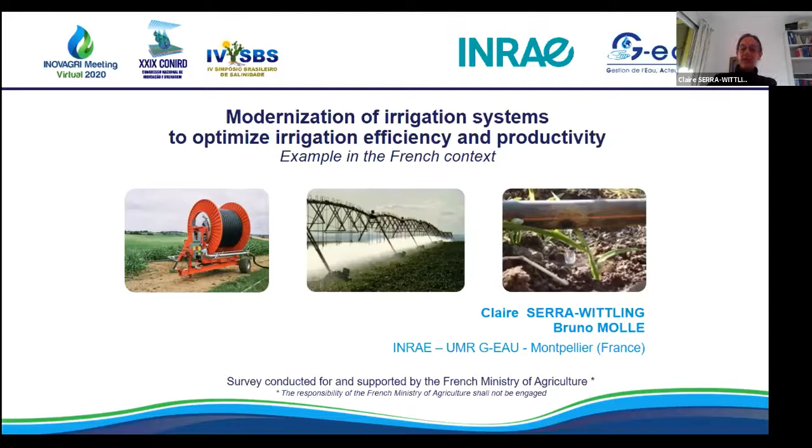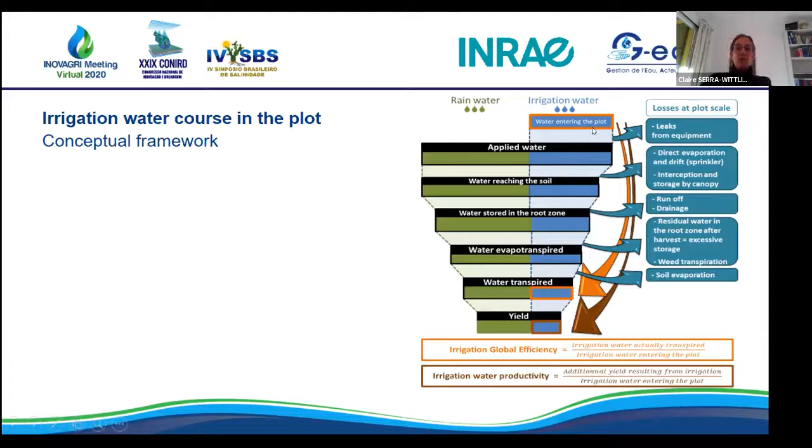So we can define the irrigation global efficiency, which is the ratio between the irrigation water actually transpired by the crop and the irrigation water entering the plot. We can also define the irrigation water productivity, which is the ratio between the additional yield resulting from irrigation and the irrigation water entering the plot.

We use a modeling approach to assess all these volumes of irrigation water. The crop model is called Optirrig. We can model the volumes at each step of irrigation water in the plot so that we can assess the lost volumes that are potential water savings. We can also assess the irrigation global efficiency and the irrigation water productivity as well.

The starting point of our study is the following: in the European Union, investments for irrigation modernization are supported by the European Agricultural Fund for Rural Development, and equipment at plot scale is eligible if it allows water savings of a minimum between 5 and 25%. So there was a need in France and in Europe to get references on water savings achieved in different conditions. That's what we have done.

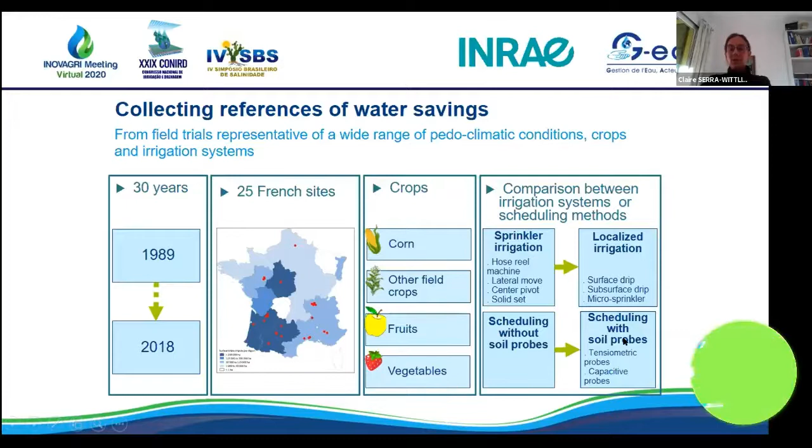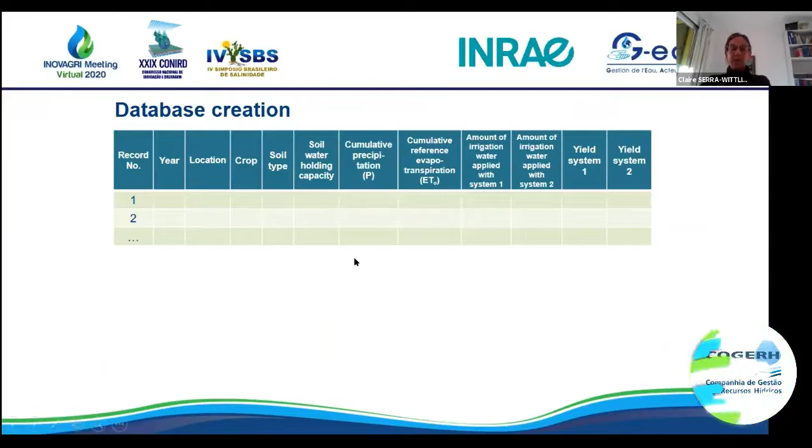This allowed us to create a database with different data: year, location, crop, soil type, etc. Here we have the amount of irrigation water applied with the most consuming system, the sprinkler system, and the least consuming system, the localized system. So we could assess the water saving made by switching from the first to the second system.

We could also assess a hydric deficit indicator of the crop season, that is the ratio between the reference evapotranspiration and the precipitation. And at last we wanted to check that there is no yield loss when switching from the sprinkler to the localized system.

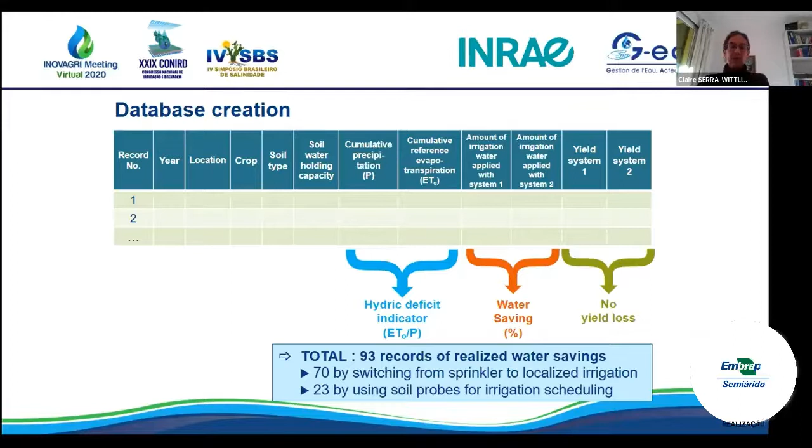Here you have some examples. You can see that when the first system is an overhead irrigation solid set system in an apple orchard, and the second system is an under-tree irrigation system with microjets, the observed water savings for apple were between 36 and 52%. For chestnuts, in another experiment, it was 31%.

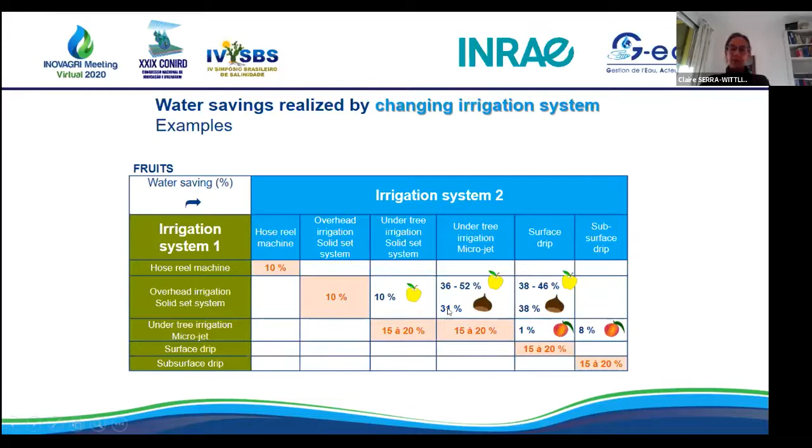With all this data, we could assess the irrigation water productivity. This indicator is the ratio between the additional yield resulting from irrigation and the water applied at plot level. You can see that in almost all cases, the irrigation water productivity is higher with the localized system than with the sprinkler system.

This is due to the fact that the localized water system consumes less water than the sprinkler system.

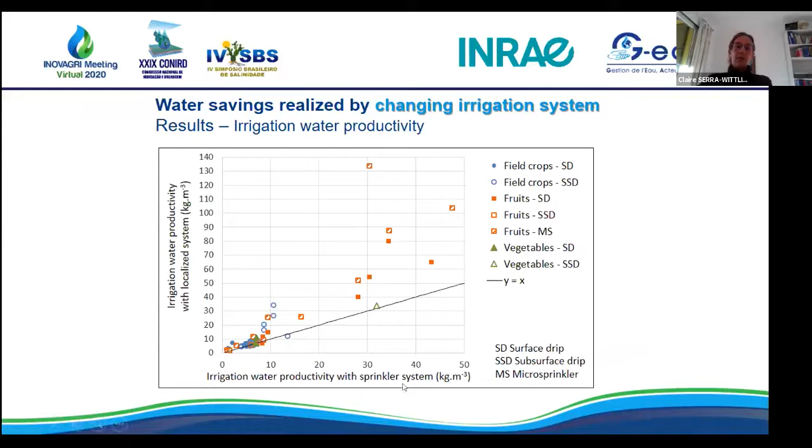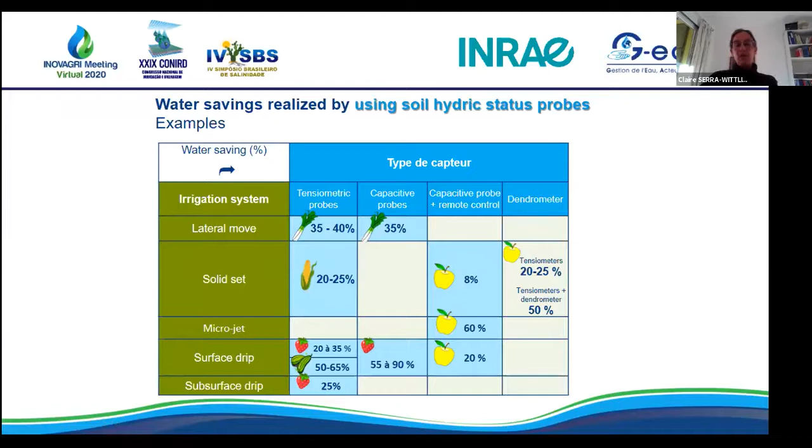Here on the left are presented the water savings obtained as a function of the hydric deficit of the year. You can see there is no influence of climatic conditions on the water saving obtained, contrary to the water saving obtained by switching from a sprinkler to a localized system, as I said earlier.

On the right, again, the water savings obtained by using soil hydric status probes as a function of the soil water holding capacity. You can see also that there is no significant influence of the soil water holding capacity on the water saving obtained, contrary again to the water saving obtained by switching from sprinkler to localized system.

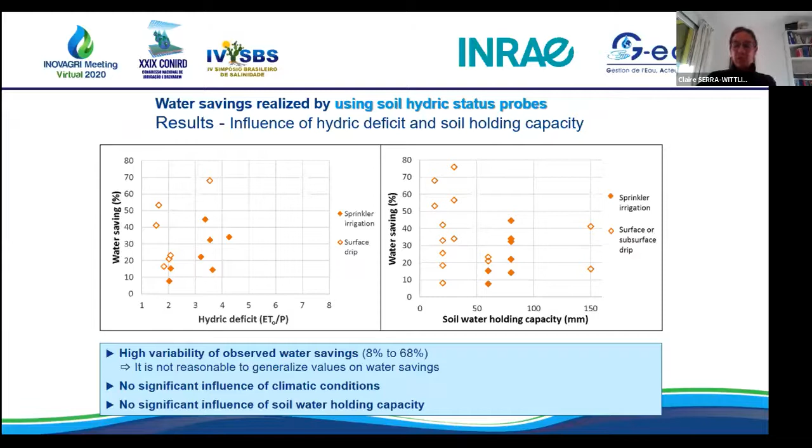And here, just to show that the water savings obtained with capacitive probes or with tensiometric probes are not significantly different.

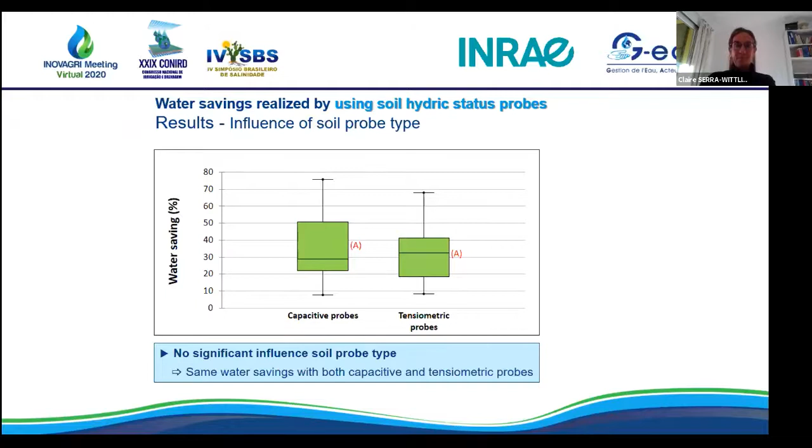So we wanted to know where the realized water savings come from. Here I show you again the graph of the water saving plotted as a function of the hydric deficit of the year. I have isolated one point of this figure that concerns a study case in France, on a soil with a low water holding capacity, with a corn crop.

Both systems compared are a hose reel machine with a water consumption of 230 millimeters and a subsurface drip system with a water consumption of about 150 millimeters, so that the water saving observed is 34%.

Here are compared both yields, and you can see that both yields are equivalent for both irrigation systems.

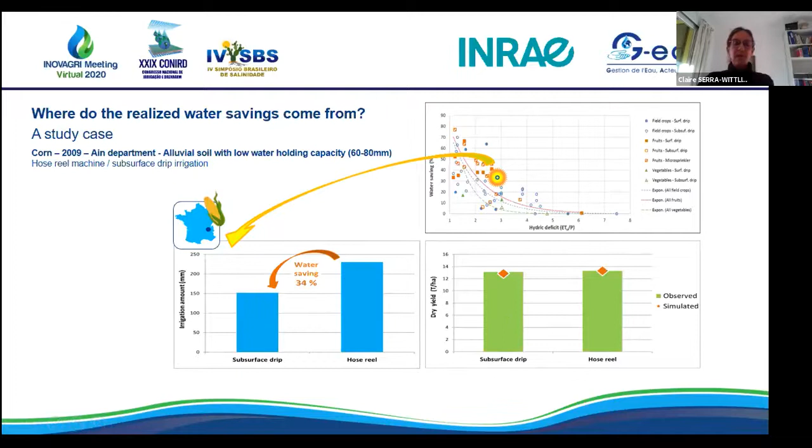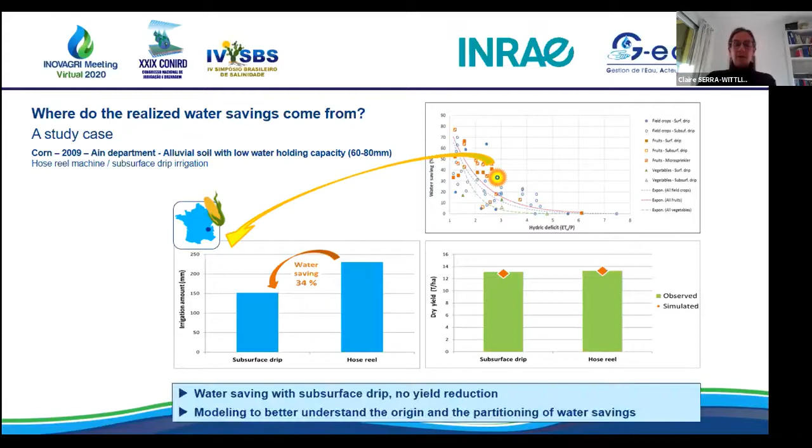So we used our modeling approach to better understand the origin and the partitioning of water savings. Here you have again both water consumption for the subsurface drip system and the hose reel system. In green, you can see the irrigation water applied that was actually transpired by the crop.

This part of water actually transpired is 68% for the subsurface drip irrigation and 49% for the hose reel. So these values represent the irrigation global efficiency that is, of course, higher for the subsurface drip system than for the hose reel system. And the water consumed above this green column represents all the losses at the plot scale.

In red, you have the losses obtained by drainage. You can see that these losses are higher with the hose reel system because of the higher amounts of water applied. And the losses by drainage are quite inexistent with the subsurface drip system.

You have also, in orange, the water lost because it remains in the root zone at harvest and will not be used by another crop. This loss is 37% by the hose reel and also more than 30% by the subsurface drip, which underlines that the scheduling of irrigation, also in the case of subsurface drip, could be improved to reduce this final water stock in the soil.

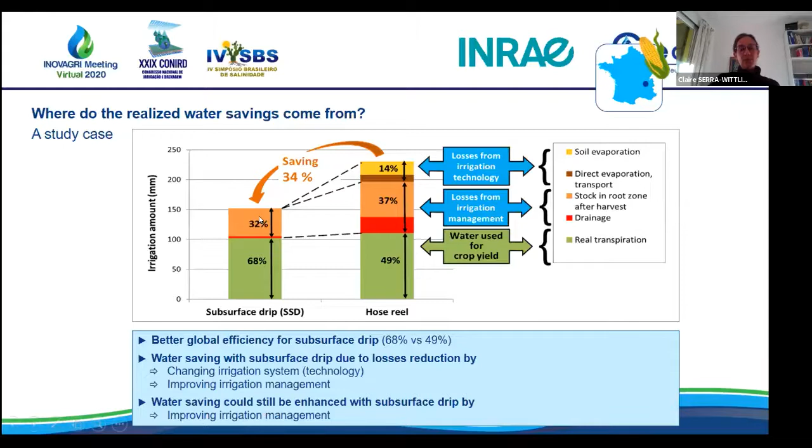So you can see, at the conclusion of this slide, that a better global efficiency can be observed for subsurface drip. Water saving with subsurface drip is due to losses reduction, by first changing the irrigation system and second, improving irrigation management. And as I said, water saving could still be enhanced with subsurface drip by improving irrigation management.

So in conclusion, water savings realized with localized irrigation systems are highly dependent on pedoclimatic conditions. In particular, they decrease when the hydric deficit of the crop season increases.

Secondly, water savings realized by scheduling with soil hydric status probes are less influenced by pedoclimatic conditions than the first water savings. And thirdly, water savings originate in reduction of losses, of course. They can be achieved not only by changing irrigation system, but also by improving irrigation management.

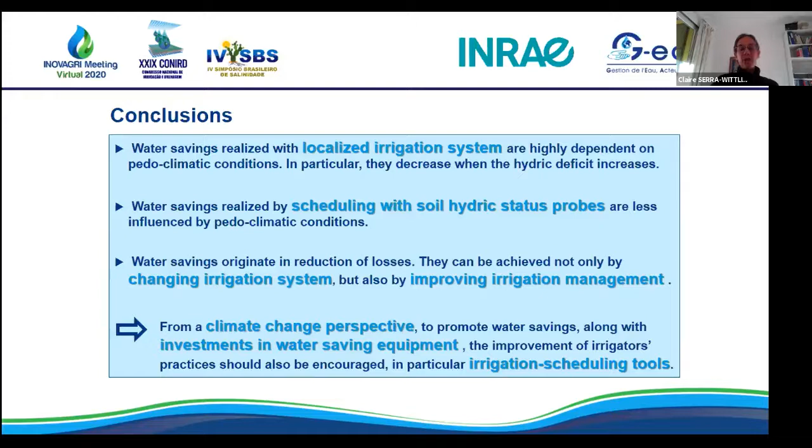So, from a climate change perspective, it is important to note that in order to promote water savings, along with investments in water saving equipment, the improvement of irrigators' practices should also be encouraged, in particular irrigation scheduling tools.

I thank you very much for your attention.

Okay, thank you, Claire. And thank you for keeping the time schedule. Congratulations, because we are often shifting, all of us. So I will continue myself and try to be...

I don't see my presentation, so I will try again. Ah, here it is. Here it is.

Well, maybe a little bit of introduction. For those who know me, you may have seen that the name of our institute has changed. In the beginning of 2020, the former IRSTEA, to which we were belonging, has been absorbed by INRAE, which is a famous research institute on agronomy in France. And at this occasion, INRAE changed its name to add the E, working on agriculture, food processing, and environment, and not only on agriculture.

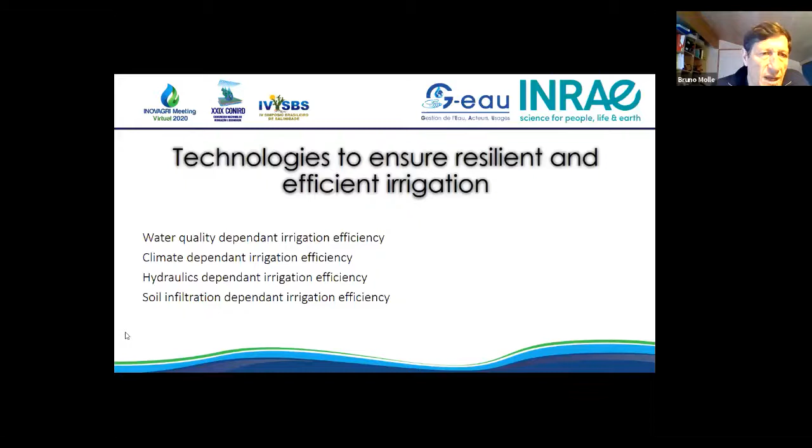Well, on my side, I'm more involved in the aspect of technology, and I will try to introduce what issues are to be faced to increase the efficiency of the different aspects of efficiency as they were presented by Claire.

If we go back to the sketch that was presented by Claire, the part of efficiency which is depending on technology could be divided into three categories.

The distribution efficiency, the quantity of water delivered at the entrance of the field and the block of irrigation; the application efficiency, which relates to the quantity of water technically reaching the plant and the soil; and the storage efficiency, which is the quantity of water effectively stored in the soil, not subjected to drift, evaporation, runoff, or other losses.

Those aspects of efficiency rely on different technical aspects. The first, especially for drip irrigation, is water quality. The second is climate conditions. The third is hydraulic performance of the system. And the last one is related to soil infiltration and soil storage capacity.

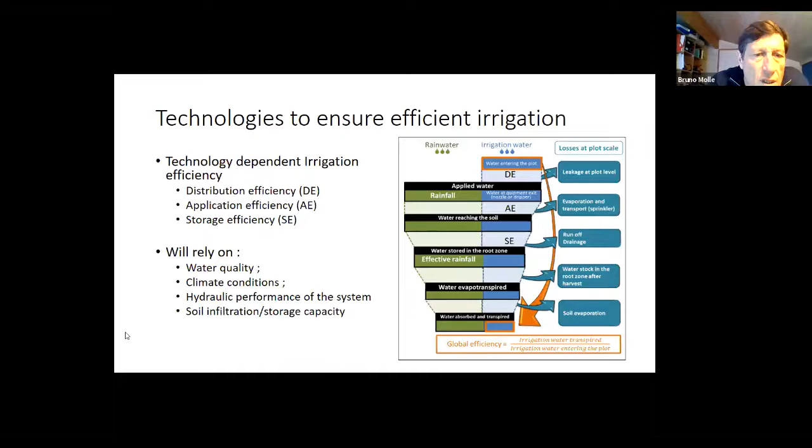So I will try to go through these aspects and give you some highlights of the research we are conducting. Regarding water quality, the concerns are mainly for the use in irrigation of surface water or wastewater, whether treated or not.

As information, worldwide, treated wastewater reuse represents something about 36 million hectares, about 12% of the total irrigated area, which is a quite surprising figure that was evaluated recently.

The problem related to the use of surface water concerns the loading particles, the presence of algae, the content of solutes, whether nutrients in wastewater or salts, the presence of pathogens when focusing on their dispersion or regrowth in the system, or the presence of parasites, pollutants, and all this stuff.

This stuff escapes filtration, passing through it. It will deposit or grow in the irrigation system, and it may induce a drop in the performance of the system.

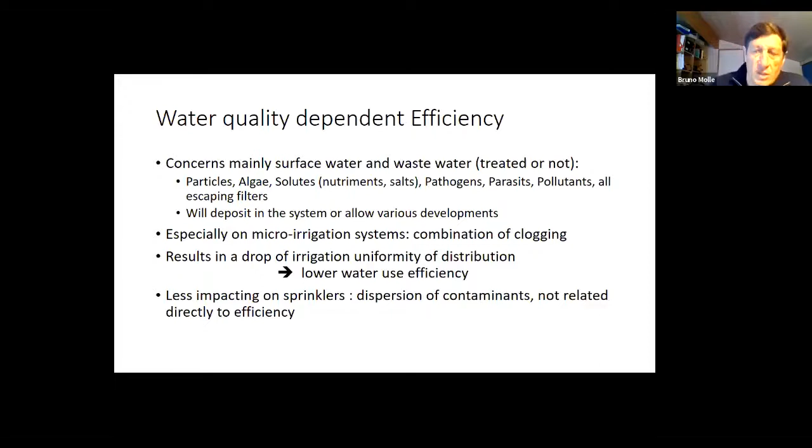If we speak about the different forms of clogging occurring in drip irrigation systems, when we go into the field—because we can work in the lab and we're all very comfortable there, but going into the field is always of interest.

If we go into the field and observe what happens in terms of size of particles after filtration, we can observe that the particles found at the beginning of an irrigation system, compared to those found at the end of this irrigation system, show growth in particle size.

Inside the irrigation system, we have various types of aggregation phenomena that occur, and this results in the case I am displaying here, even if the filtration is 80 microns, as in this example, ending up with particles that could reach more than 500 microns.

This is mainly due to the fact that turbulence occurring in the distribution system will increase the probability of shocks between particles and the probability of particles aggregating together.

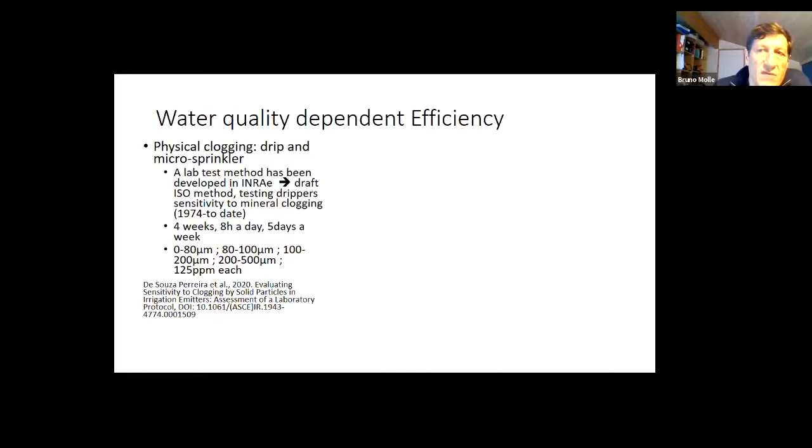The type of results that we have is this one. This is the case for manufacturers.

So we have—I don't know if you see my mouse on the screen, probably. Excuse me. Oops.

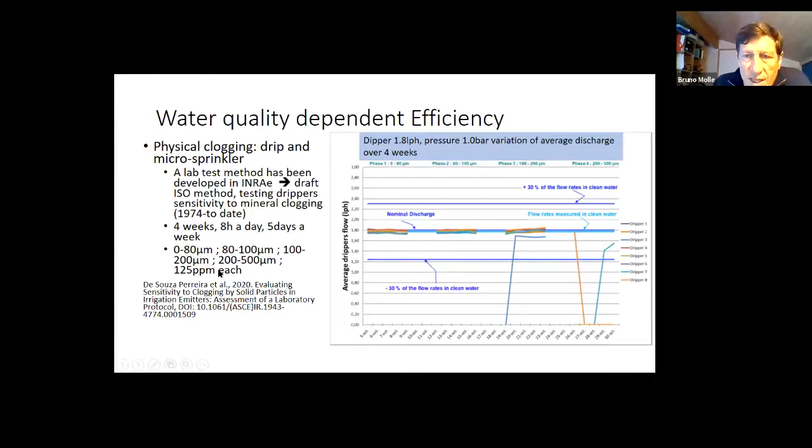The type of particles we use are only mineral particles with a phase mix between these two thresholds, constituted of natural soil treated as in agricultural soil analysis, where we remove all the organic matter, disperse all the particles, and end up with these different individual particles.

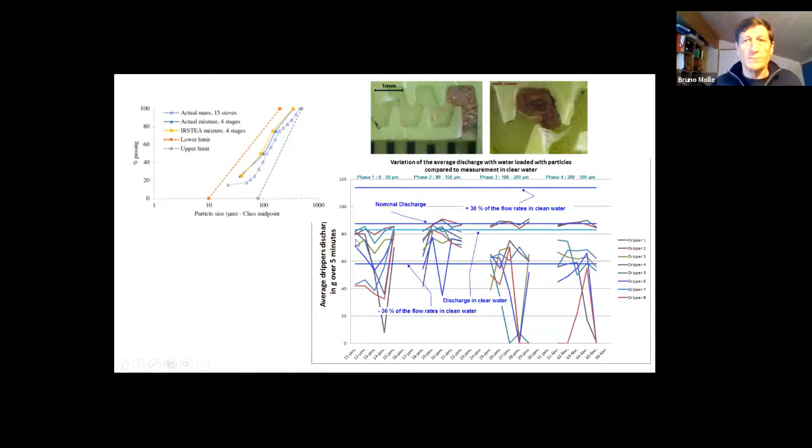So I was speaking first about this aspect of particles. The second aspect driving clogging is the development of biological or biofilm material inside the drippers, due to the fact that the water is often nutritive, even in small quantity. This development is especially important in treated wastewater.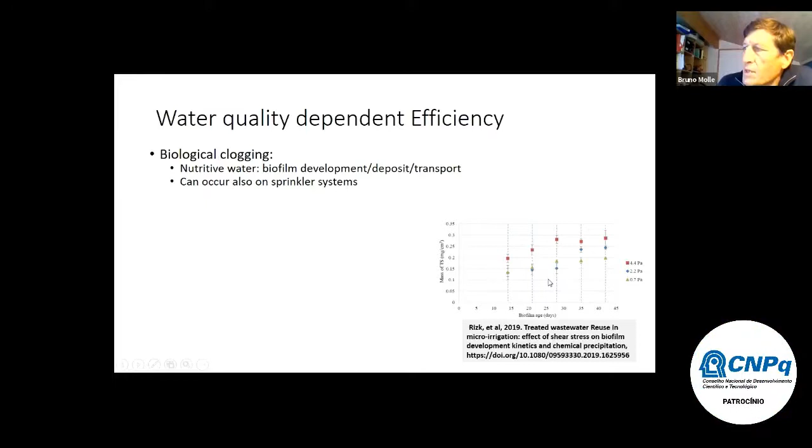In this example we analyzed treated wastewater again with different drippers. We had 3 types of drippers with different velocities, resulting in different shear stress, which characterizes the flux of water flow inside the dripper. We observed that the higher the shear stress, the higher the quantity of biofilm that develops, over a period of about 40 to 45 days, which was quite surprising.

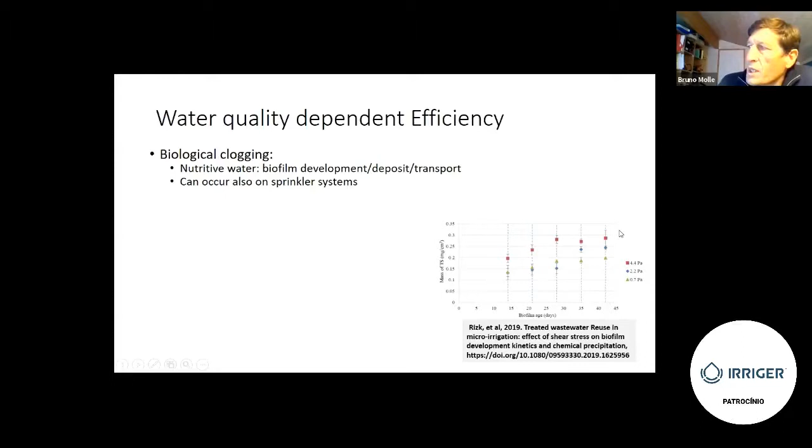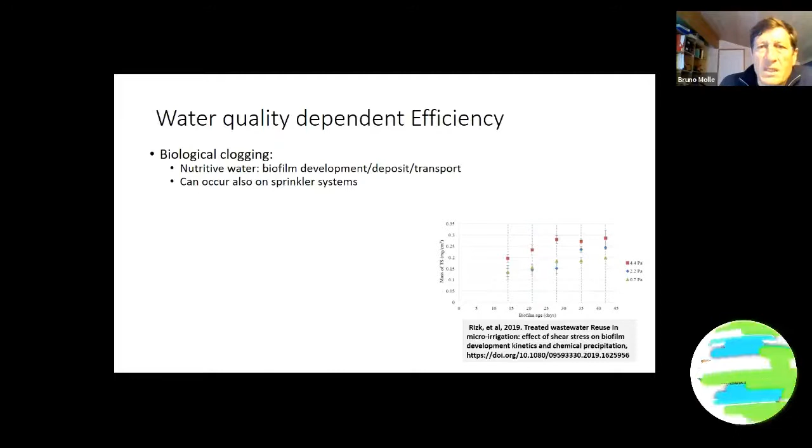We were supposing the biofilm would develop more rapidly at lower discharge or lower velocity, but in fact, with lower velocity, the biofilm doesn't have enough to feed on to grow properly.

What's interesting is observing this biofilm development phenomenon to see what happens. For this, we developed an observation system using OCT, optical coherence tomography, which I'll describe further, along with transparent drippers in which we can observe the deposit or growth of biofilm inside the system over time.

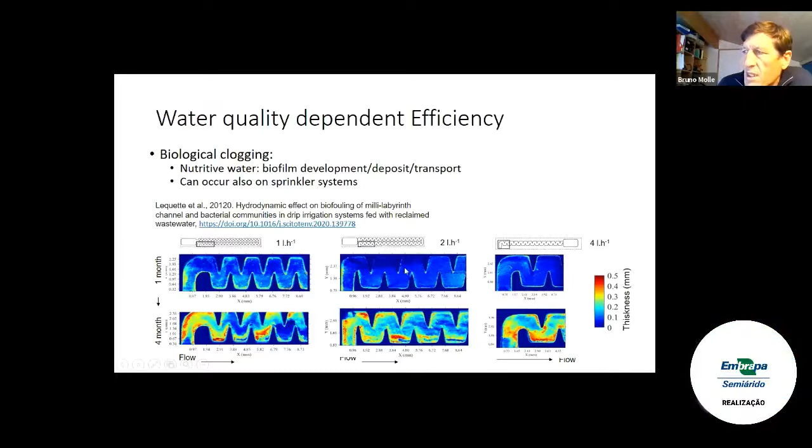In this case, we have three different discharge cases, resulting in 3 different velocities, and we can observe the development, which may not be very obvious, but we can infer that at 4 liters per hour, with higher shear stress, the development is larger than at lower discharge.

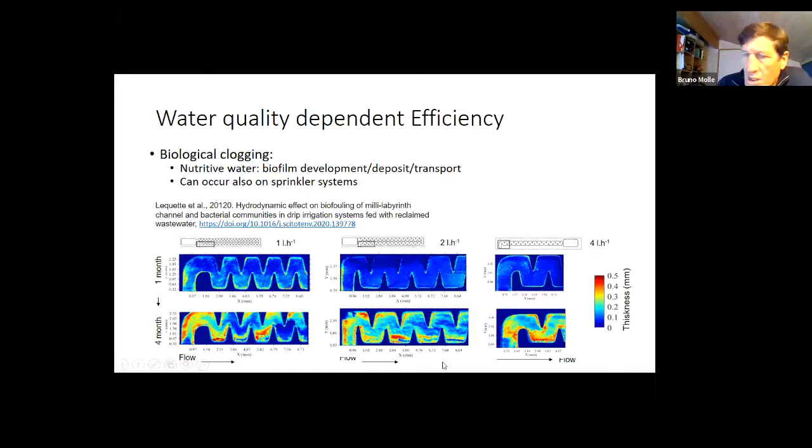The third type of clogging phenomenon is related to the presence of chemicals in solution in the water, in particular calcium that precipitates as calcium carbonate.

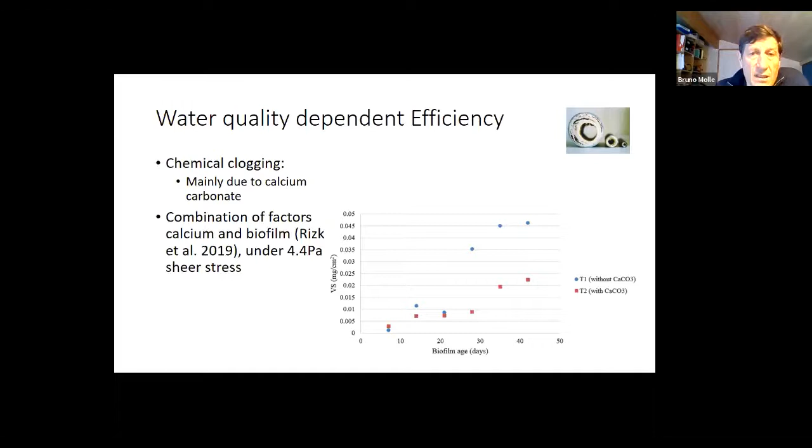This generally combines with the development of biofilm. In our case, we were suspecting that the precipitation phenomenon would enhance biofilm development, but in fact it's the opposite.

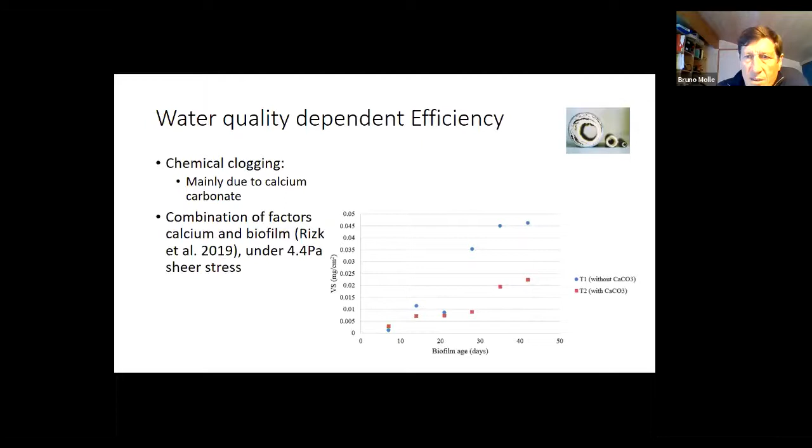Here's an example of what happens over a period of 42 days with the same dripper as before, using wastewater added with or without calcium carbonate. We observe that without the calcium carbonate, the biofilm development is much more rapid than with it. This is thought to be due to an abrasion phenomenon that erodes the biofilm inside the system.

Well, I just mixed my slides, and this one was supposed to arrive sooner.

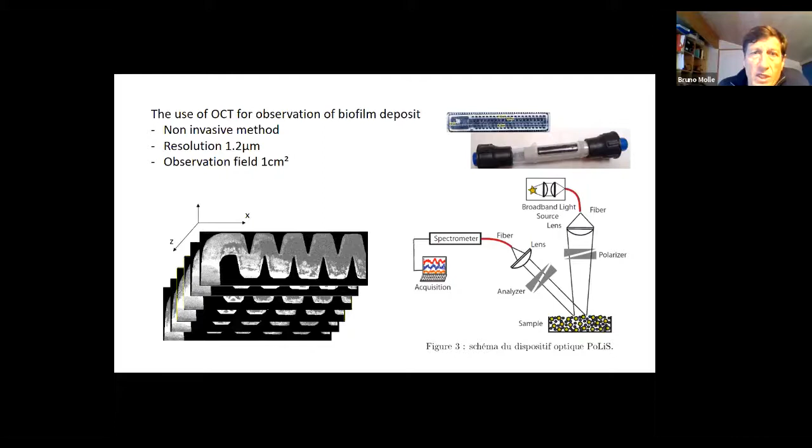This is the principle of the optical coherence tomography system, a non-invasive method we use with a standard dripper placed in a transparent tube. The resolution is very high, 1.2 microns, and the observation field is quite important. Using this system, we can observe the development of the biofilm over time and across different layers, from the bottom of the drippers progressively upward. This is used to map the development of the biofilm, and can be used further in simulation of water flow.

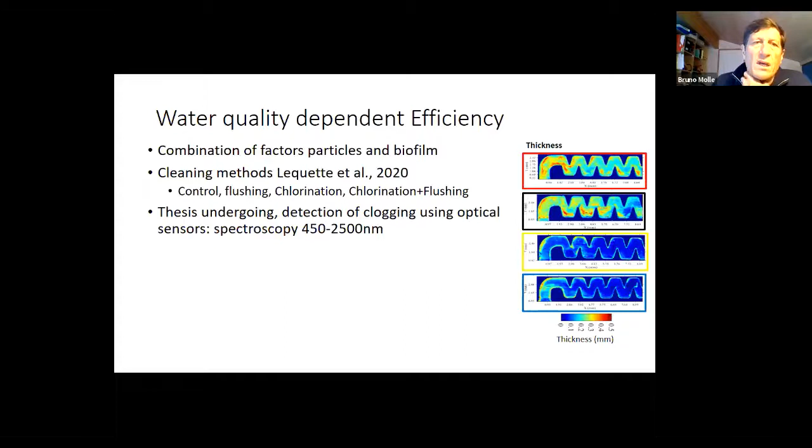This water quality dependent efficiency results from a combination of factors that lead to the accumulation of biofilm. This can be controlled, and we have an example of the control we can achieve for a combination of particles and biofilm with four different options: the first is a control, the second is regular flushing of the system, the third is chlorination alone, and the fourth is chlorination plus flushing. We observe that chlorination, not surprisingly, is very effective, but the idea is to optimize the use of chlorine to reach this efficient cleaning.

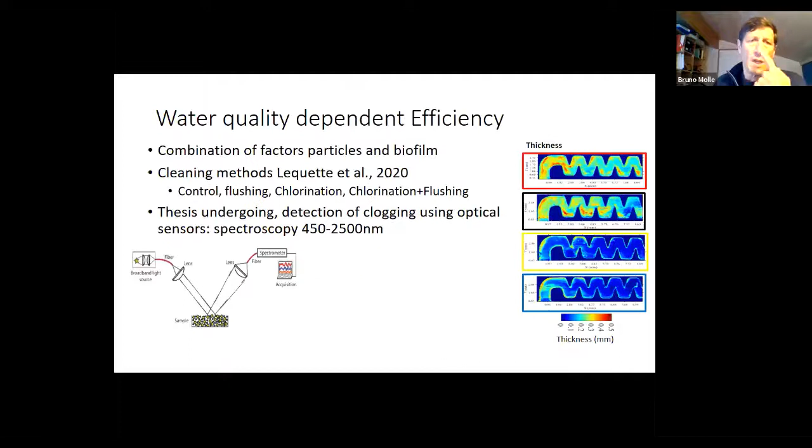This last slide is an example of ongoing work to develop an optical sensor that will help identify, inside the dripper or dripping system, the accumulation of particles or biofilm that induce this clogging phenomenon, in order to launch the cleaning procedure beforehand. This is an example of the signal we obtain between 450 and 2,500 nanometer wavelengths, given by different concentrations of kaolinite clay. We identify the different signals emitted by different forms of clay and biological matter, to analyze the light reflected by the clogging material and determine the type of clogging occurring, which will help define the type of intervention to plan, whether it is chlorination, the use of acids, or hydrogen peroxide.

The second aspect related to efficiency—I'm sorry, I see there is a chronometer that I just discovered, so I'm a little bit late.

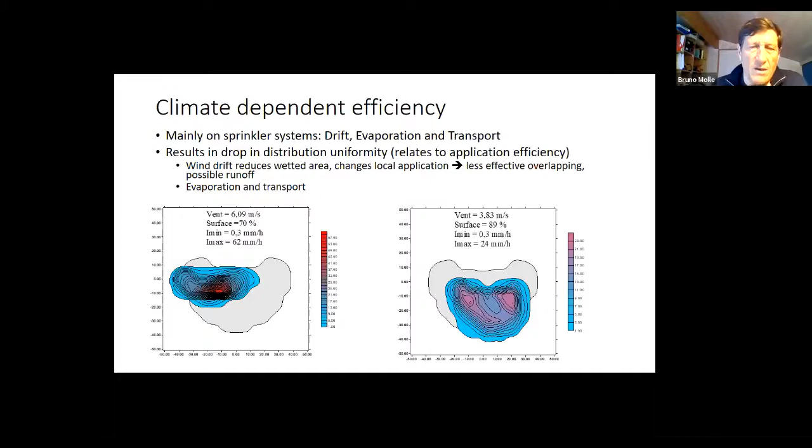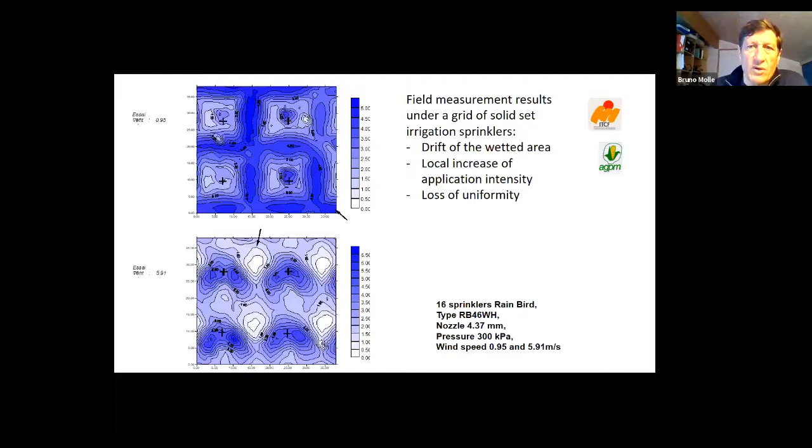The second aspect is related to climate. You have an example of what has been measured on big guns in windy conditions. The effect of wind on distribution is a shift of the wetted area, which is not very surprising, and a concentration of this wetted area, resulting in an increase in water distribution intensity. Another example is given for a solid set sprinkler, which highlights precisely the loss of uniformity. Coming back to the big guns example, from the different maps we had at the beginning, we have calibrated a distribution model that allows us to simulate what happens on a field over a number of climate conditions.

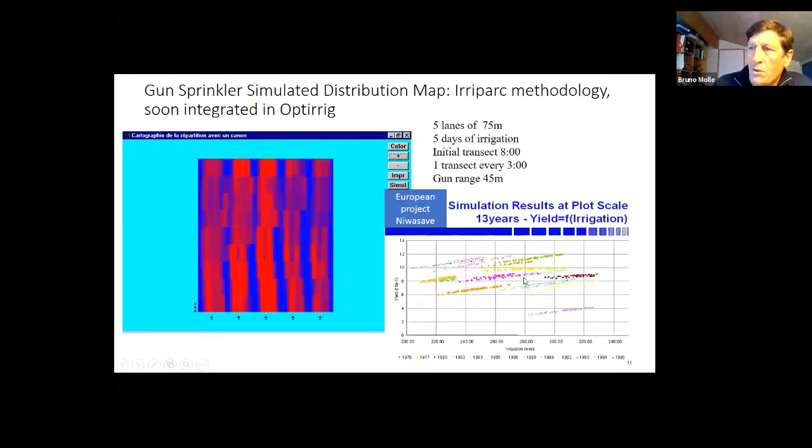In this case, we have the simulation of a grid of a plot, representing each square or rectangle, on which we can simulate using the Optirrig crop model that Claire was speaking about. We can simulate the quantity of yield produced depending on the quantity of water received. This is an example highlighting the effect of the uniformity of distribution on the productivity of each plot.

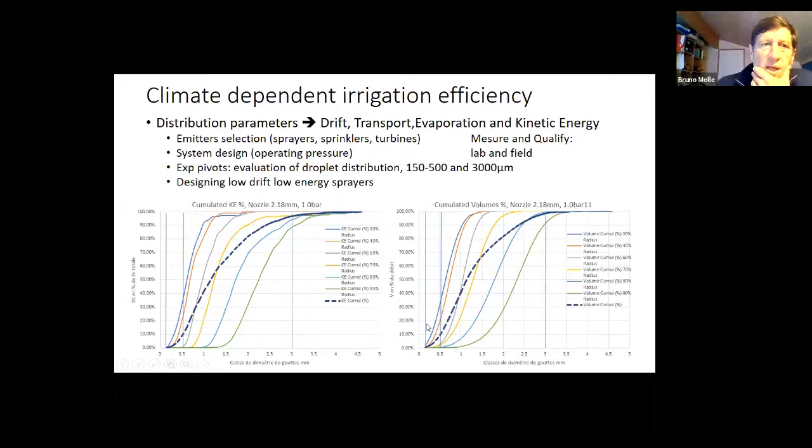We have identified, using the ballistic method, two important thresholds in terms of particle size. The first is about 150 to 200 microns.

That represents the threshold for particles to be totally evaporated or totally transported out of the irrigation area. The second limit is about 450 to 500 microns, where the drift, or the distance to which droplets fall from where they were emitted, is very large. For other droplets, they are more or less submitted to gravity, so they shift proportionally to wind velocity, but they are not lost in general.

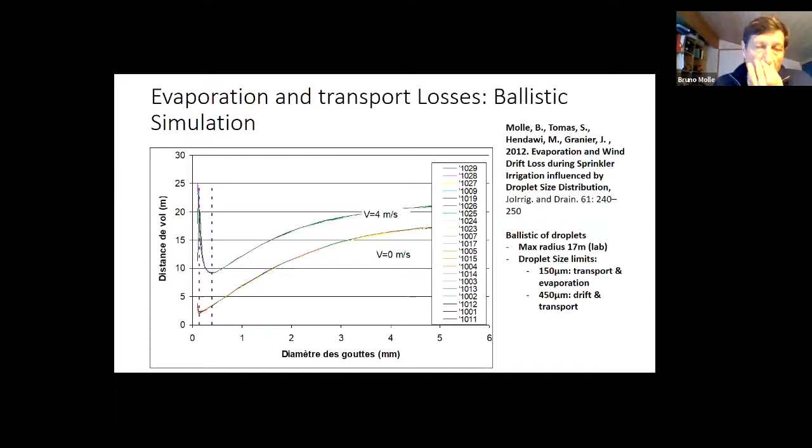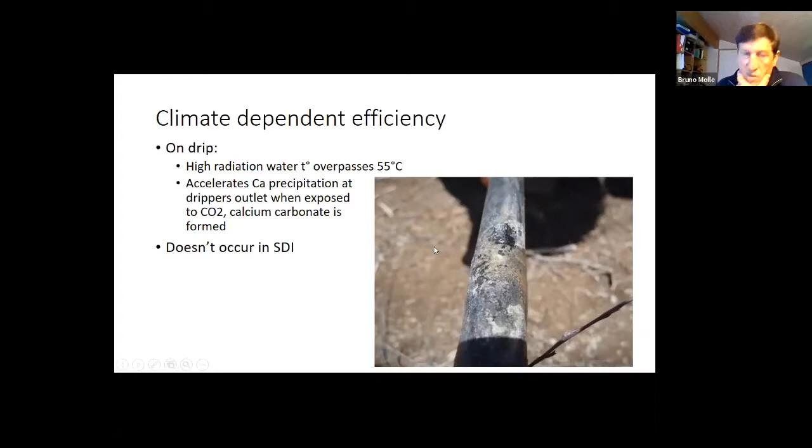So I will go faster. In terms of climate dependency of efficiency, regarding the drip irrigation system, the only effect could be the accelerated precipitation of calcium carbonate. You have an example here: the orifice of the emitter has been totally blocked by the precipitation. This, of course, doesn't occur with SDI.

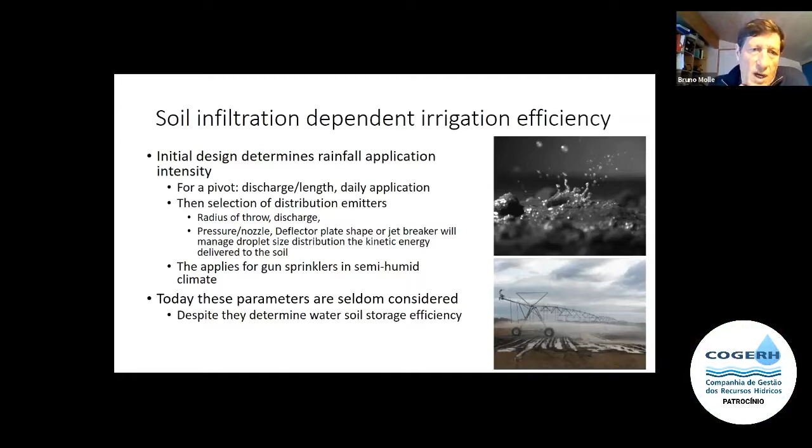We can say that today these parameters are seldom considered in the design of irrigation systems, which may be detrimental for the soil. So I will finish my presentation with this one, and sorry for being a little bit late, and I give the floor to Nicola.

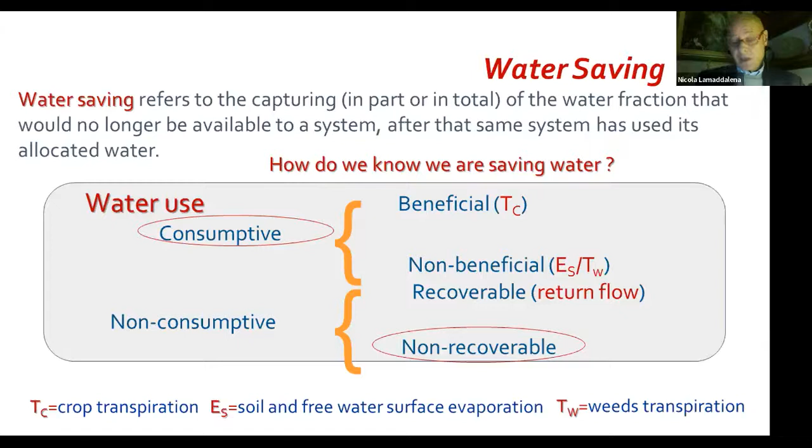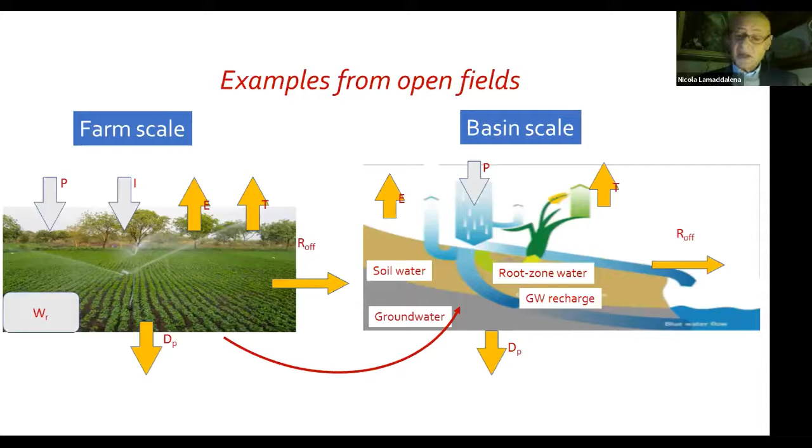But in my opinion, we have to be careful. We have to try in any case to have very high efficiency at the farm level, because even if the deep percolation goes to recharge the groundwater, to retake water from groundwater we have to use energy. So we are shifting the problem from the water to the energy. It is true that it is not a loss in terms of basin scale, but it is for sure a loss in terms of energy consumption. So in my opinion, the previous presentations highlighted very much the fact that irrigation efficiency at the farm level has to be as high as possible.

The work I'm going to present is related to a study I did on an irrigation system in Italy some years ago. In this irrigation district, water was distributed to farmers by a rigid rotational delivery schedule, with a 10-day rotation and a fixed amount.

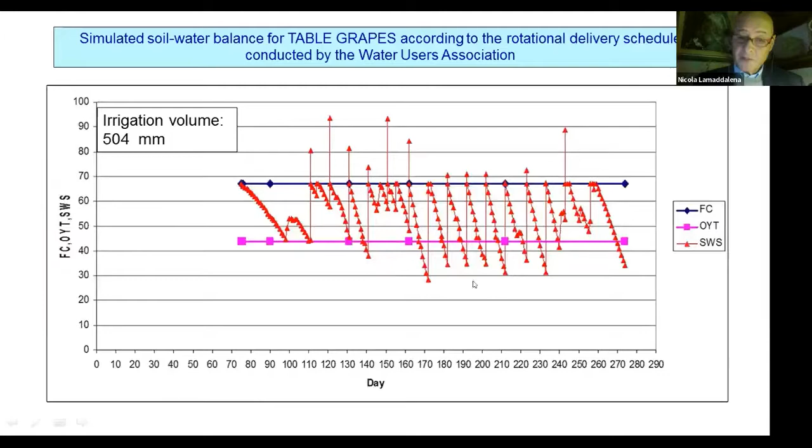That's 1,300 cubic meters per hectare of water saving, and they would not have had any kind of crop stress, so the crop yield would have been much higher. That's why it's important not only to supply the right amount of water to the soil and crops, but also very relevant to consider when we supply water to the crops. We have to supply water at the right moment if we want the best yield response.

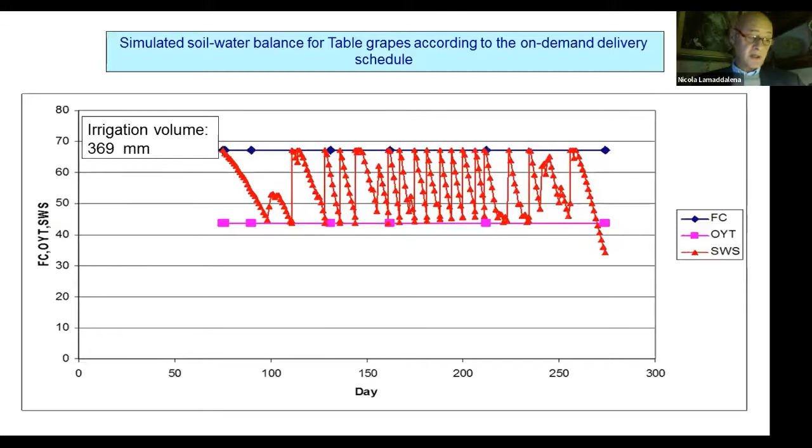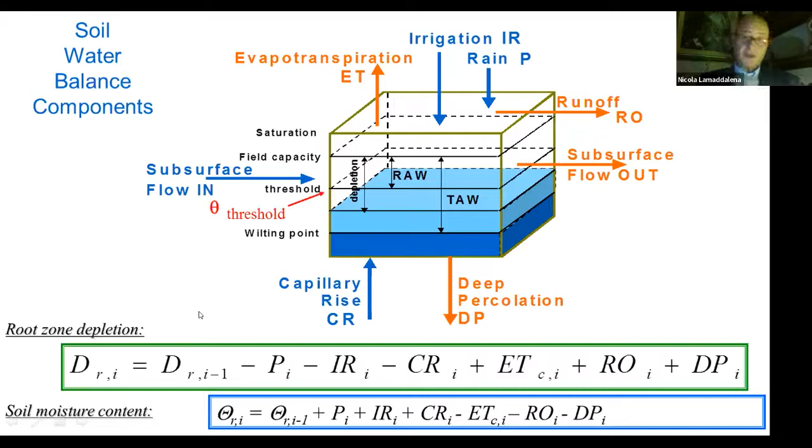To this module we have added the salt balance model. Starting from a given salt content in the soil, S0, the salt input from irrigation is the irrigation water, while the salt output is achieved through leaching by drainage water. The mass of salt added by irrigation water, SAI, is calculated as I, the irrigation water supplied, multiplied by the electrical conductivity of the salted water applied to the soil. The salt drained, SD, is calculated as the drainage water multiplied by the electrical conductivity of the drainage water. The total salt in the soil is the initial salt content, plus the salt added by irrigation, minus the salt removed by drainage.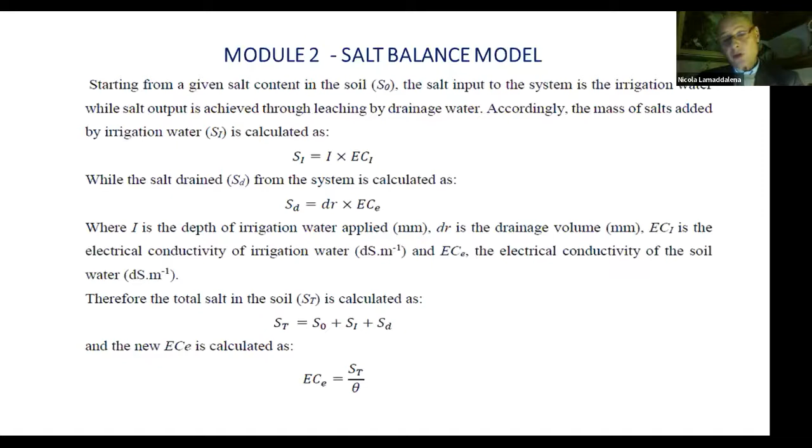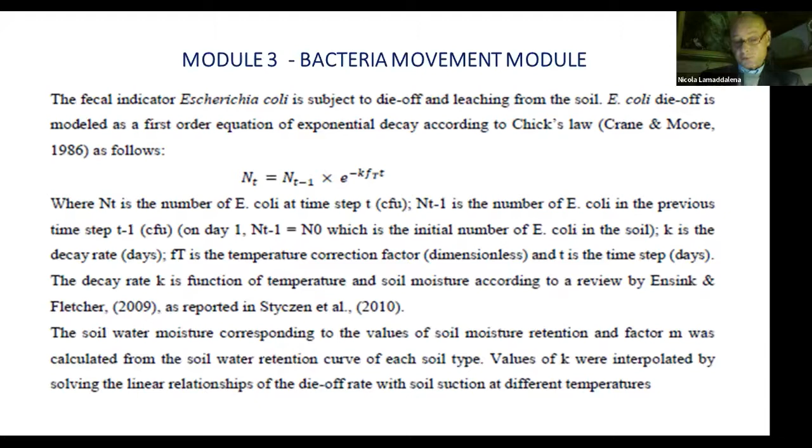Then we added a 3rd module, the bacteria movement module, for when treated wastewater is used. This is very important, since there is a lot of concern in the world about using treated wastewater because farmers are afraid of bacteria movement. We added this module so we can compute the accumulation of bacteria, in particular Escherichia coli, in the soil, by solving a decreasing exponential equation, starting from the number of E. coli at a certain time step t, and tracking how the accumulation of E. coli occurs in the soil following this equation shown on the screen.

And then the fourth module is nutrients management. In particular, we focused on the nitrogen cycle, nitrate leaching and uptake, and also on the phosphorus cycle.

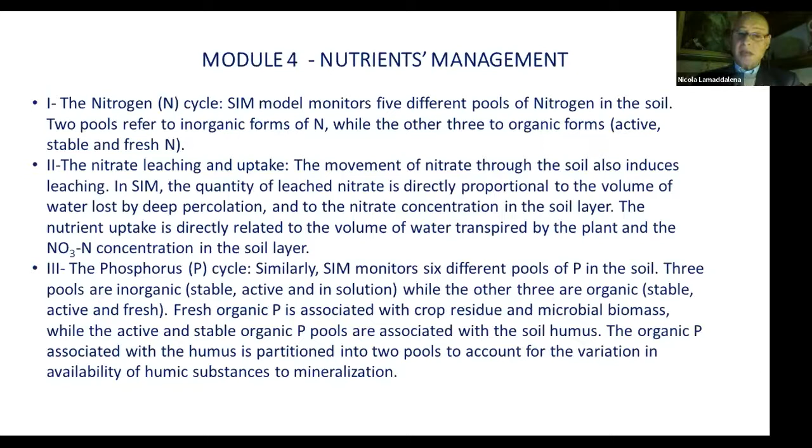Let me show you the application of this model to a case study carried out in Souss, Morocco. Why Morocco? Because the IAV, the Institut Agronomique Vétérinaire in Agadir, was a partner of the project. So we carried out all the experiments in this pilot area in the south of Morocco, very close to Agadir city.

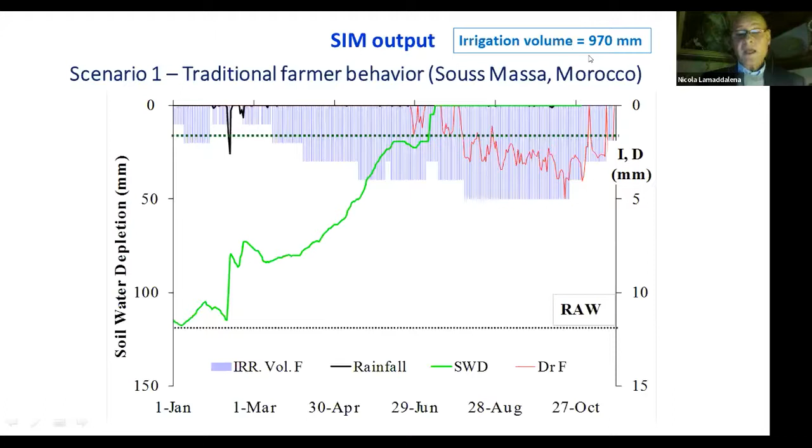So we have drainage into the soil, this red line. You can see that in this area farmers are used to supplying around 1,000 millimeters per irrigation season, 970 millimeters. If they would use a modeling approach based on the equations I showed you earlier, instead of 970 millimeters, they could apply 691 millimeters. That's around 300 millimeters less, which corresponds to 3,000 cubic meters per hectare less water.

It's really a lot of water, especially in water scarce countries like Morocco. You can see that we do not have any drainage. Only when there is rainfall do we record some drainage, these red lines, and we do not have any stress or accumulation of water into the soil. So it is much more performant using the output of the simulation models.

In terms of electrical conductivity, you see two lines, one continuous and one dotted, when using treated wastewater. Of course, if we follow the farmers' rules, we have more accumulation of salt because farmers supply more water. If we use treated wastewater with the modeling approach, we have less accumulation of salt because we supply less water, so less salty water. When we use fresh water, there isn't a substantial difference between the farmer's behavior and the modeling approach.

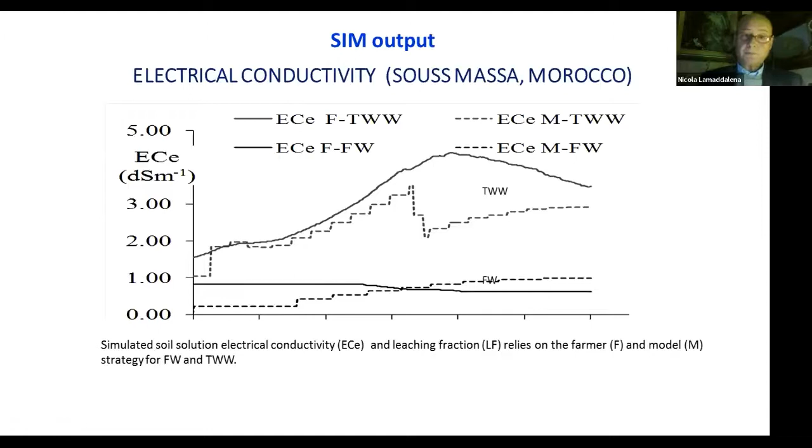On the contrary, the leaching fraction should be higher when we use the modeling approach, because we supply less water, so we risk having more leaching fraction compared to the approach used by farmers.

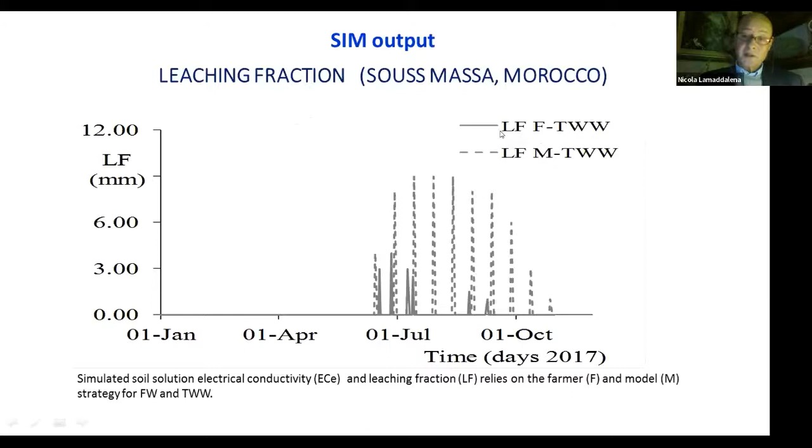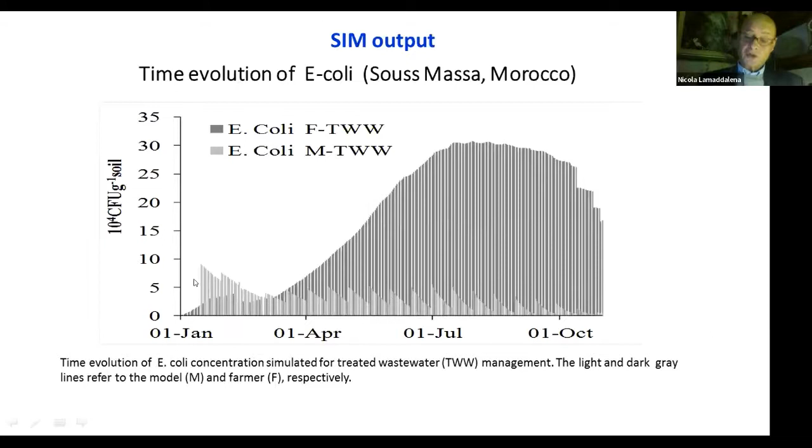This slide is also very interesting because it refers to the evolution of E. coli. This line corresponds to the accumulation of E. coli when farmers apply their usual delivery schedule, applying water every day. As they apply more water to the field, there is a higher accumulation of E. coli, while if farmers use the modeling approach, they would apply much less water, resulting in much less accumulation of E. coli on the soil.

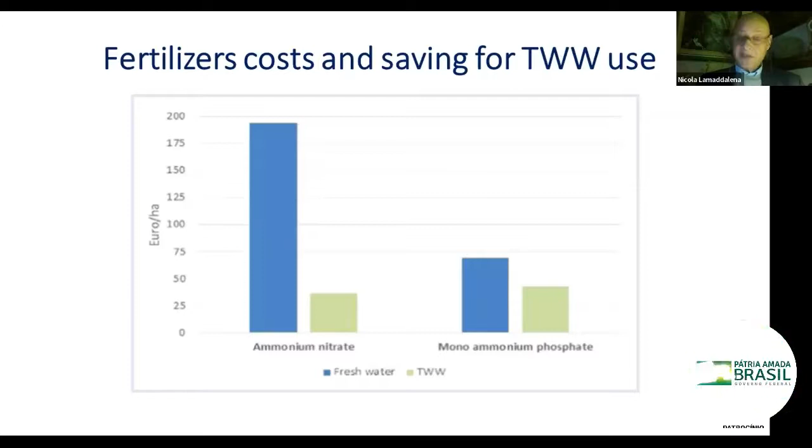In terms of fertilizers, since the treated wastewater is full of nitrates, ammonium nitrates, and ammonium phosphates, you can see that by using treated wastewater, farmers can save a lot of money. This is the money they have to spend when using fresh water, and this is the amount they have to spend if they use treated wastewater, in terms of ammonium nitrate and ammonium phosphate. So farmers, by using treated wastewater, can save a lot of money every year.

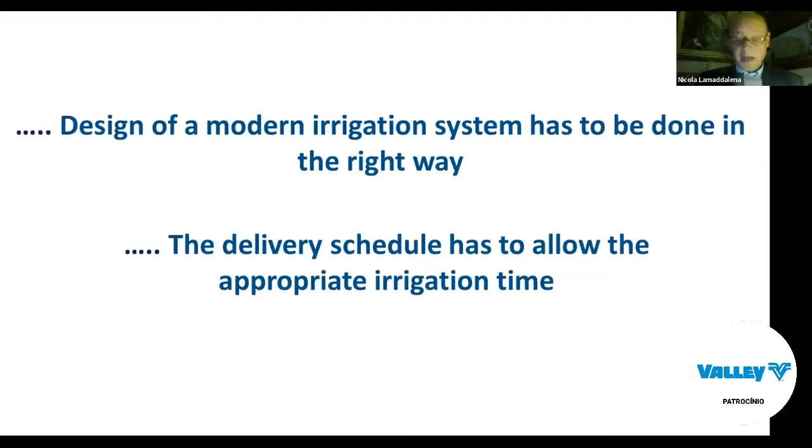Of course, to apply this modeling approach, the design of the modern irrigation system has to be done correctly. Water should arrive to farmers with the appropriate discharge and appropriate pressure. Bruno was showing the effect of pressure head on drippers and sprinklers, and this is very relevant, because if the pressure is not adequate, farmers will not have an adequate way to distribute water on the soil and to the crops. So their yield will be reduced.

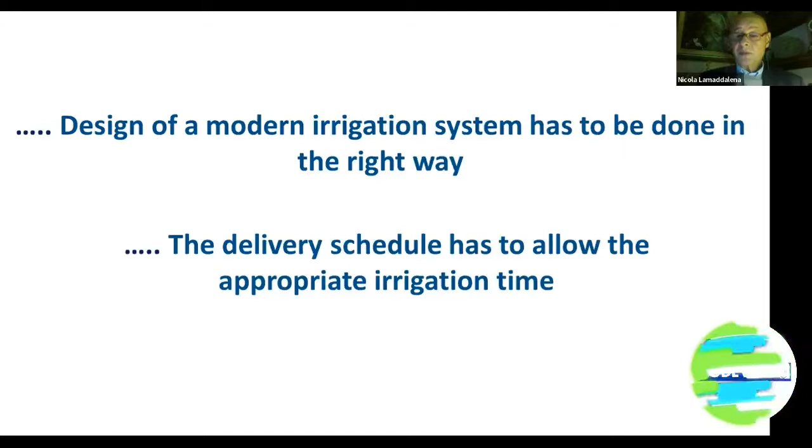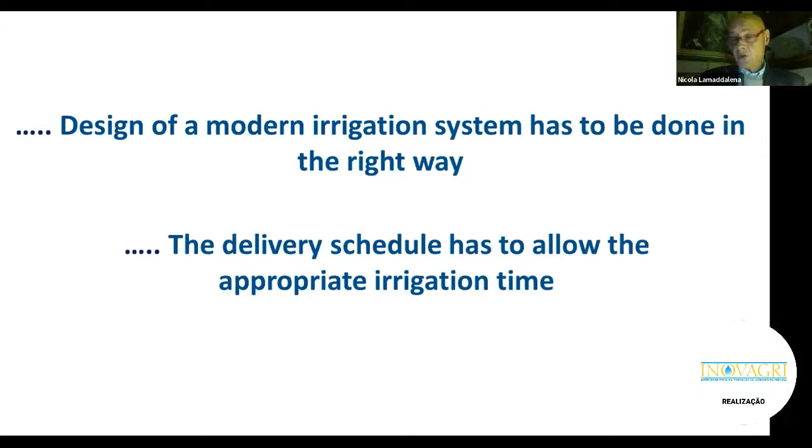Also, the delivery schedule has to allow the appropriate irrigation time, because if the management agency applies a rigid rotational delivery schedule, even if we have the modeling approach and tools with us, farmers cannot apply water simply because water is not available, and they have to wait their turn to apply water.

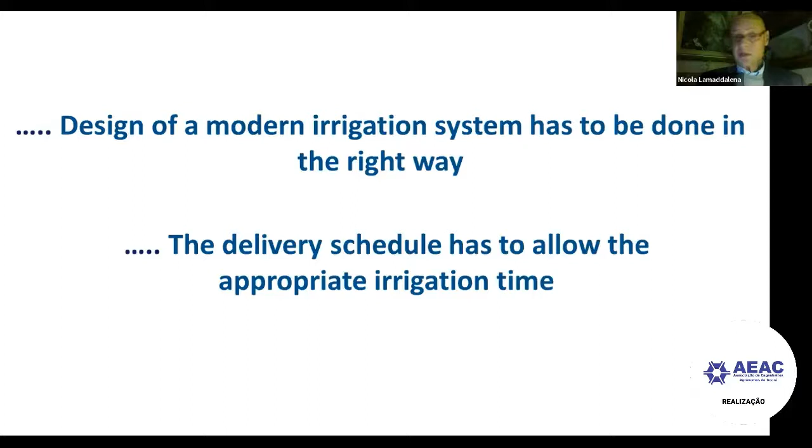This is very important and relevant if we want to save water and increase yield production. Capacity development and governance programs are very relevant, because it is not enough to provide the irrigation agency or the farmer with good software or technology if nobody helps them use the new technology, in terms of machines, drippers, and tools like managers or software. This kind of training is not only for farmers, but I would say it's rather important to focus capacity development programs on managers, designers and extensionists, and at the end to farmers, because all the chain of decision makers involved in irrigation needs to be trained on new technologies and on modeling.

Thank you very much. This is all I have to say today.

Bruno, the floor is yours. Okay, thank you, thank you.

Thank you for the interesting and connected presentation, despite we didn't communicate so much before, but we know each other, so it's enough.

So I don't know how it works now for the questions. I have questions here in the presentation. Can you? I can show for everyone. Let me see, I'll share with you the question.

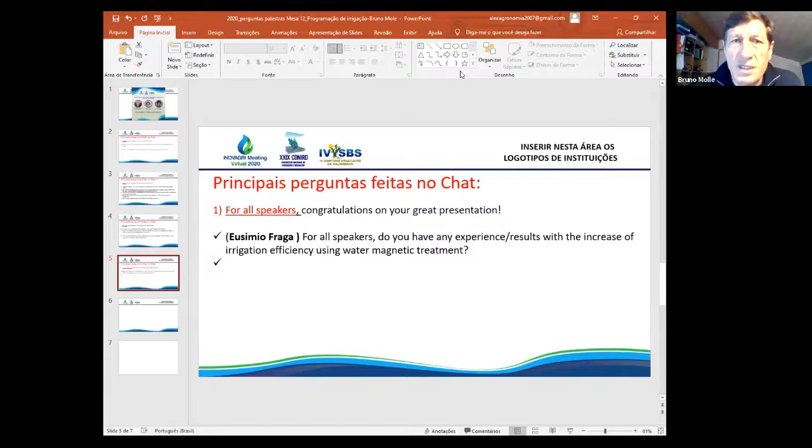It seems that experimentally, our colleagues from INRAT in Tunisia - that you know, Nicola - have been evaluating these systems, and they have identified some progress in water use efficiency. But when you look at the significance of the results, it can be questioned. So it seems there is some progress, but it's quite complicated to identify the exact progress. I don't know what you can say, Claire, since we were discussing this together.

We know that this company is now carrying out a project on magnetic treatments for center pivots. So maybe in 2 or 3 years we will have some interesting results about this. Oh, that's good - so you are using center pivots, because in Brazil it's common, though some people are starting to use drip irrigation.

Until now, this company was selling its magnetic solution only for vegetables, so quite small volumes of treated water. But for center pivots, the technology is a little different because the volumes to be treated are far higher, and they wanted to test their technology on pivots for this purpose.